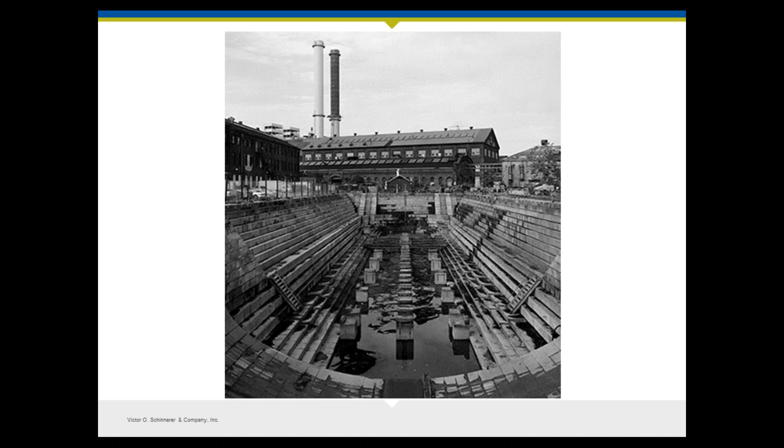So let's talk about this dispute. Spearin was hired by the U.S. Navy to build a dry dock at the Brooklyn Navy Yard. A dry dock is exactly what you see in this image. It is a large staging area for the construction of ships and warships in this instance.

Spearin was given by the U.S. Navy a set of plans and specifications, and those plans and specifications called for, amongst other things, the removal and relocation of an existing sewer line that bisected the site that would eventually be the dry dock that Spearin was going to build. Now, Spearin went ahead and complied with the plans and specifications and rerouted the sewer line around the site where they would be building the dry dock.

And as soon as they started constructing the dry dock itself, the New York area got a series of heavy rains, and the sewer line backed up. There was internal pressure on that sewer line that was relocated, and it flooded the entire site.

Spearin stopped work on the site and told the Navy that they were not going to continue doing work until the sewer line was fixed, until the Navy came up with a way to fix it and hired either them or someone else to do it, because they considered it to be a menace to the workers who were working there at the site.

Now, the Navy weighed their options and ultimately terminated the contract with Spearin. And as you can imagine, since we are talking about a case here, Spearin ended up suing the Navy for a certain amount for unpaid work that they had performed and also for anticipated profits that Spearin had not been paid for their work. Now, the Navy made a series of arguments to defend against this claim.

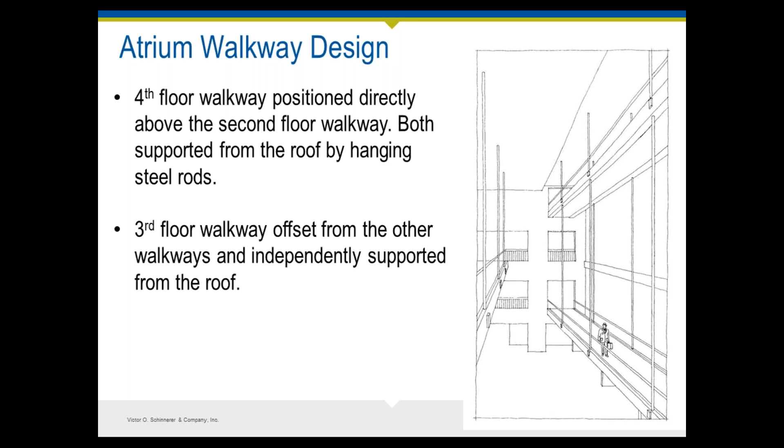The unique feature here is that the 2nd floor bridge hung below the 4th floor bridge, sharing the same steel rods that connected both skywalks to the structure above. That's what the original design was. The idea was that the 4th floor bridge would latch onto a rod at midpoint, and the 2nd floor bridge would hang from the bottom of the rod. The 3rd floor bridge was offset and hung from its own set of steel rods connected to the atrium above. And here's the problem.

It's not something you can design, you can build from the design very well.

It should be noted that in the decision, Missouri licensing law requires that corporations practicing engineering designate responsibility for all engineering work to one individual. That's the person whose name is listed with the licensing board and who signs and seals the document. Jack Gillum was designated by the company as the engineer in responsible charge of the firm's engineering work.

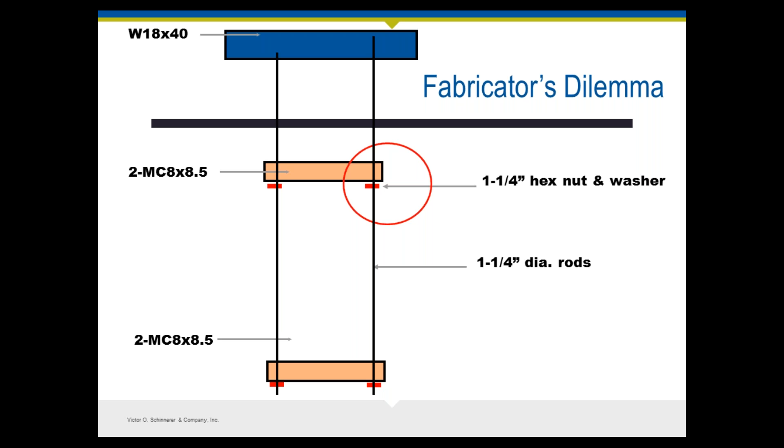He had a young structural engineer, Dan Duncan, who actually prepared or supervised the preparation of the project's structural drawings. Duncan is the one who reportedly designed the single rod concept and then eventually approved the fatal change to the 2-rod connection idea. This is how it was supposed to work. The problem, of course, was that the rod had to be continuous and smooth and yet have a threaded connection for the hex nut and washer to hold the upper skywalk, something a fabricator can't really do very easily because the threads require one diameter of that steel rod.

There were efforts to refine it, and this was one of those projects that was fast-tracked. The construction contract was issued in February 1978, but the architecture and engineering drawings were not issued until August of 1978.

The framing plans by the structural engineering firms were issued for review, showing the 2nd and 4th floor skywalk framed by box beams made of 2 channels, full length of the bridge, 120 feet long. The structural drawing noted that the box beams were connected to 6 1 1/4 inch diameter rods per walkway, and these structural drawings were sealed by Jack Gillum.

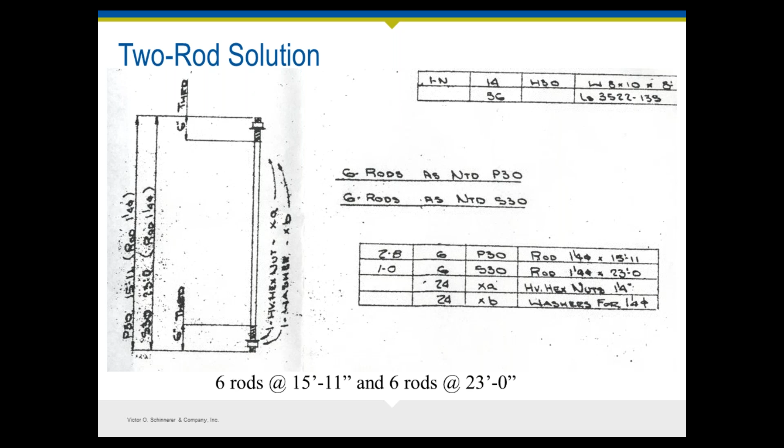In May, the structural details were again issued for review, and in August, they were finally issued for construction of the atrium A section. The documents that were issued referred to a critical detail leading to the eventual failure of the system.

Here's what ended up being built. The original design was prepared by Duncan and called for 6 continuous 1 1/4 inch steel rods connecting both the 2nd and 4th floor walkway, and therefore the weight of both walkways would pull down on the rods from the atrium steel.

During construction, the steel fabricator proposed that the single rod be changed to a double rod assembly, the one on the right, so the rods would actually be split at the 4th floor box beam. The fabricator submitted shop drawings of the revised connections to Duncan, who approved them without reviewing the 4th floor box beam connection.

By offsetting the rods and creating a two-rod system, that would eliminate the need to thread the entire length of the rod, and would only require threading the top and bottom 6 inches of the rod.

This clarification, the testimony says, the steel fabricator called the steel detailer back with a modified design for the two-rod system that was approved. And the effect of the change is quite obvious: the load was doubled on the nut and washer supporting the 4th floor walkway, and that became the critical area of failure.

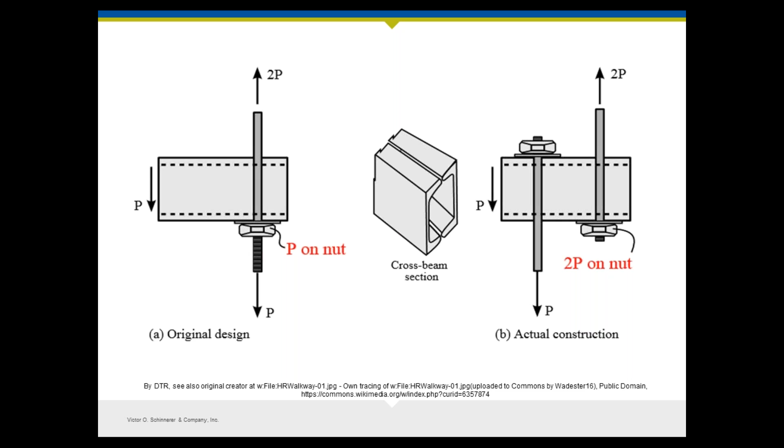Let's go over some of the shop drawing review standards. The shop drawing review process actually worked as it was planned to work. The fabricator asked questions of the engineer, the project architect, and Gillum's own reviewer all asked questions about the design change, and at least 4 different people detected a change in the submittal.

The problem was that the process failed in its reliance on one person, the design engineer, who did not perform a simple and critical calculation to check the strength of the revised connection. So the process was okay, and the licensing board found that, but the court found that one person in that chain of command failed to do his job.

The steel shop drawings began a review process as required by the contract documents. It's interesting that they were stamped, received, and reviewed. The shop drawings were forwarded from the general contractor to the design team, received by the structural engineers. A technician for the structural engineer was assigned to check the shop drawings. He was not a licensed engineer.

He noticed the change from the original single rod design and talked with Dan Duncan, who was the PE who actually designed the original setup, about the change. Duncan said that he had been in contact with the contractor and understood that the contractor could not make the walkway system with one continuous rod. Testimony at the disciplinary hearing stated that Duncan told the technician that 2 rods was basically the same as the 1 rod connection.

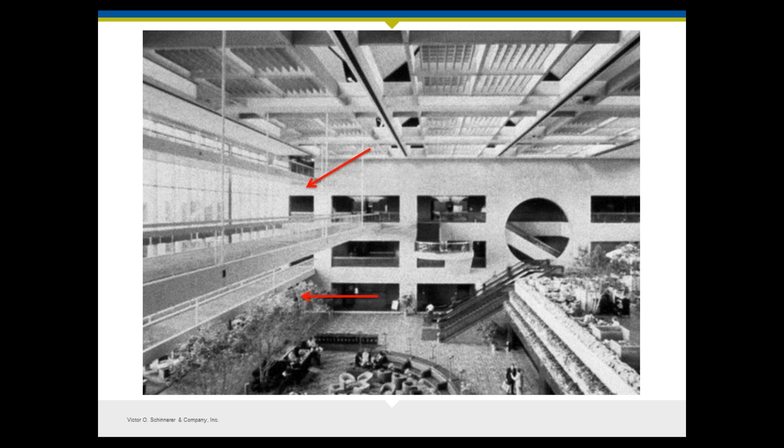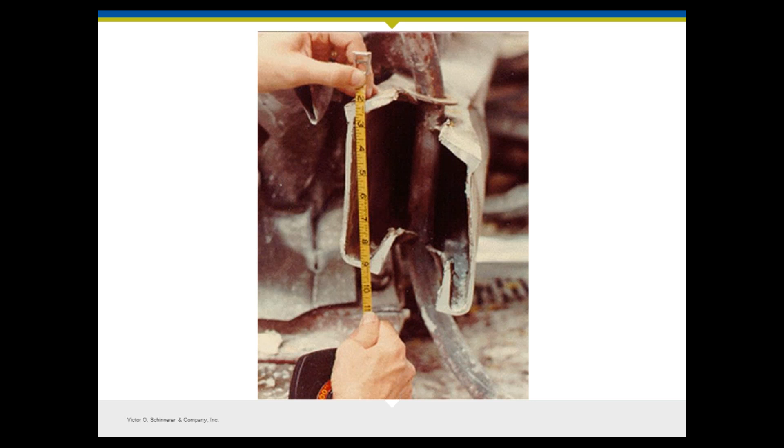This picture, that's the collapse, and this picture really tells the story of what happened. The nut washer holding the walkway simply sheared through the box beam assembly. Because the support lacked any redundancy, failure of the one connection caused the entire walkway system to fail.

Much has been said about the case over the years. Some say the licensing board was simply looking for someone to blame, and others thought that revoking the engineering license was not enough punishment. So this case really is relevant not so much in the outcome, but in how the court arrived at the decision.

This is illustrated by looking at three of the seven holdings of the Court of Appeals, paraphrased here. The structural engineer's duty is to determine that the structural plans which he or she designs or approves will provide structural safety because there's a strong possibility of harm that existed. And what they found is that there was total indifference to this duty, and therefore indifference to harm—that's gross negligence. So what they found is that both Duncan, the engineer, and Gillum, who was responsible for Duncan, committed gross negligence.

Even though it may have been customary practice to delegate some of the design, that's not a proper defense to a violation of a statute, because engineers and architects often have a non-delegable duty of responsibility when you sign and seal something.

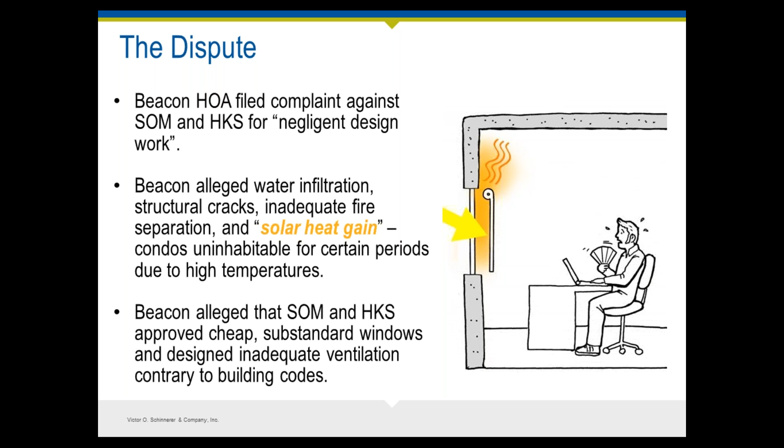Probably the most important claim in the minds of the residents was that during the summer months, the condos heated up to a point where you really could not get the units to cool down to a comfortable level. The Beacon Homeowners Association alleged that the architect and engineering team had approved cheap substandard windows and designed inadequate ventilation, contrary to building codes and presumably contrary to the architect's standard of care.

So let's get to the positions of the respective parties. Right off the bat, one of SOM's primary arguments was that there was no contract between them and the Beacon Homeowners Association. Imagine you're an architecture firm like SOM and you get served a complaint from the Beacon Homeowners Association. You go looking through your files, and while you might see a project named Beacon, you don't see an agreement that you have with them.

You have not provided this homeowners association with any services, and SOM's argument became: listen, you bought this property from a developer—if you have a problem with the property, sue them. Another argument SOM made was that the architect doesn't have a tort-based duty owed to the Beacon Homeowners Association. They argued they owed a duty to their clients, the developer, but not to the Beacon Homeowners Association. They also argued that if future purchasers of a project I design can sue me on a negligence theory, when does my liability end?

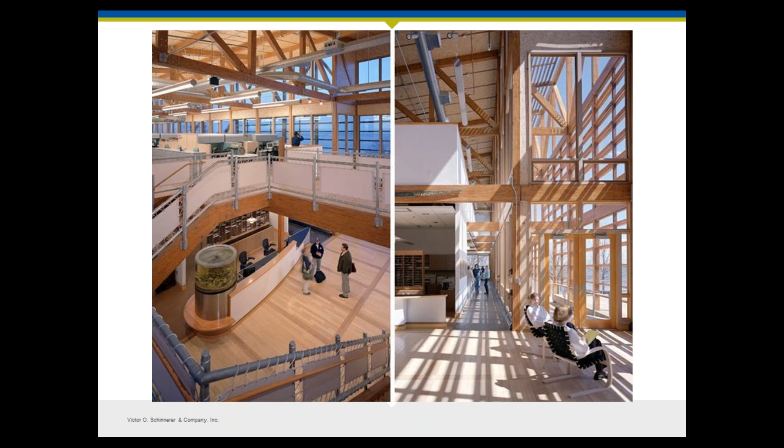The building was finished in 2001. By the end of that year and into 2002, leaks were already evident, with water penetrating into the wood and into the building. Then significant rot on the exterior wood members was evident by the late 2000s. So it was pretty clear the attempts to weatherproof the exterior parallam members had failed pretty dramatically and pretty quickly.

One thing that makes this case different from the others we've talked about is that we don't actually have a final opinion from a court. Like many construction disputes, this case was settled after some litigation, but we have a few opinions from a federal court on motions that give us clues as to what happened, though not a final opinion. So we're guessing a little bit at the results of this case, which is pretty common, to be honest.

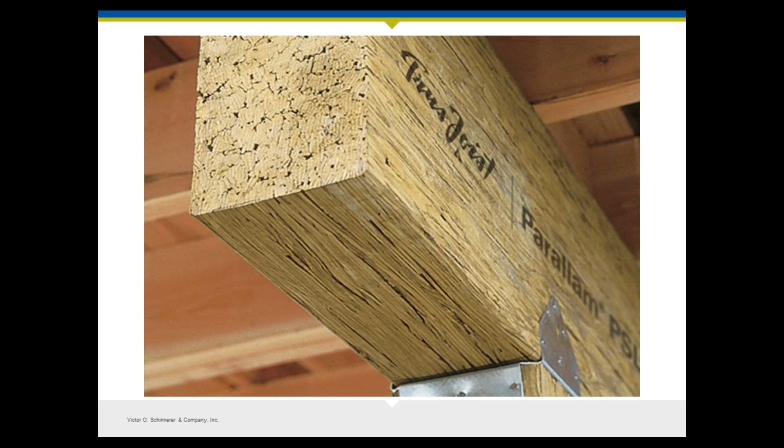What do we not know? Quite a lot about this case. We don't know about the contracts between the parties. We have no idea if there were contracts between the architect and the owner describing the responsibilities and nuances of specifying green products and some of the hazards that can result. We don't know if Polyclear coating was inherently a product that would never have worked, or if it was just applied improperly. And we don't know if Weyerhaeuser held itself out as having specialized knowledge about that coating, and if so, could the architect rely on such a representation by Weyerhaeuser, a supplier on the building. So that's a lot of questions about this case, and not a lot of answers, to be honest.

A little shameless self-promotion: the AIA does offer a lot of good materials to help you as design professionals navigate sustainable projects and some of the new issues we're seeing. I'd recommend anybody look at our D503-2011 Guide for Sustainable Projects. There's language in there you can insert into your contracts that discusses things like untested materials and describes exactly the architect's responsibilities and the owner's acceptance of whatever those risks might be.